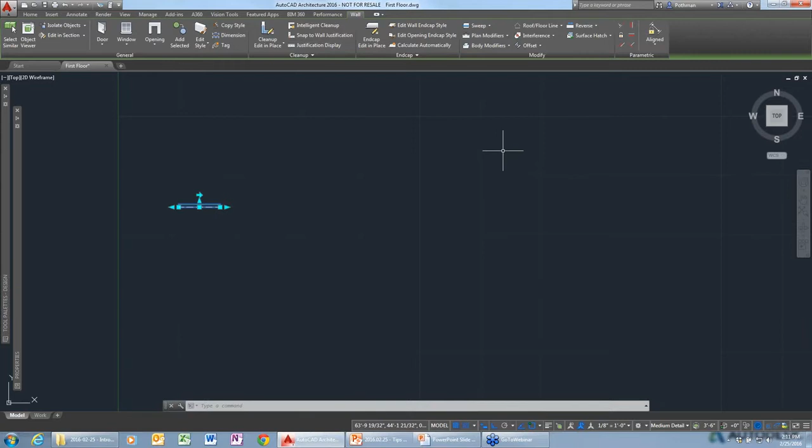We also heavily use the tool palette. On the main design tab, you'll have the various types of objects, but it's just going to start the command. So if I pick on wall, it's just going to start the wall command. We can also break it down into specific types of walls. So if I want to draw a concrete wall, I can select concrete, and I'm drawing a concrete wall instead of just a generic wall. So you have a lot of information readily available here in the tool palette that you can access directly, and you'll see in a little bit how much time you can save by using these objects instead of just lines, arcs, and circles.

AutoCAD Architecture gets into everything from basic construction drawings, drawing walls, doors, windows. It does space planning, so you can create different types of spaces and create reports about the spaces. We have symbology for furniture, plumbing fixtures, all that type of stuff that's built in.

You can do solids using something more user-friendly than a solid, called massing elements, which are much more memory efficient than a traditional AutoCAD solid, and at least as flexible, if not more flexible, than an AutoCAD solid. So we have all of that type of information.

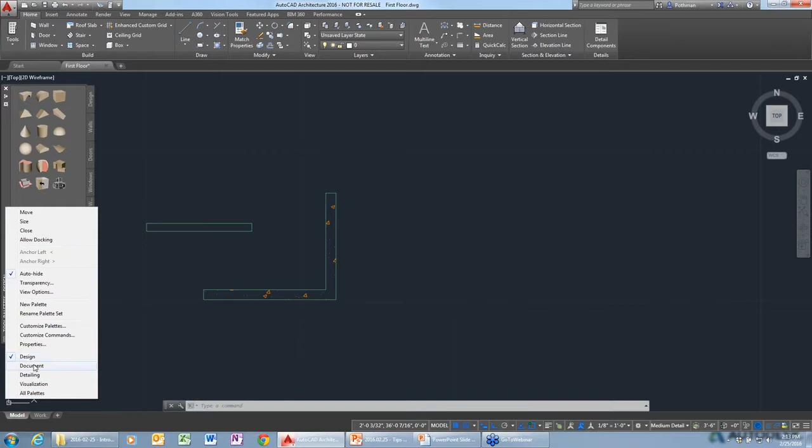If you right-click on the tool palette, you'll see that we can switch between the design palettes, which I have open right now, to the documentation palette, where we can get into information like the various types of annotation, different types of callouts and tags and schedules that are defined within the software. Also some display themes, so it can create spaces based on fire rating and things like that, create a thematic map of the spaces.

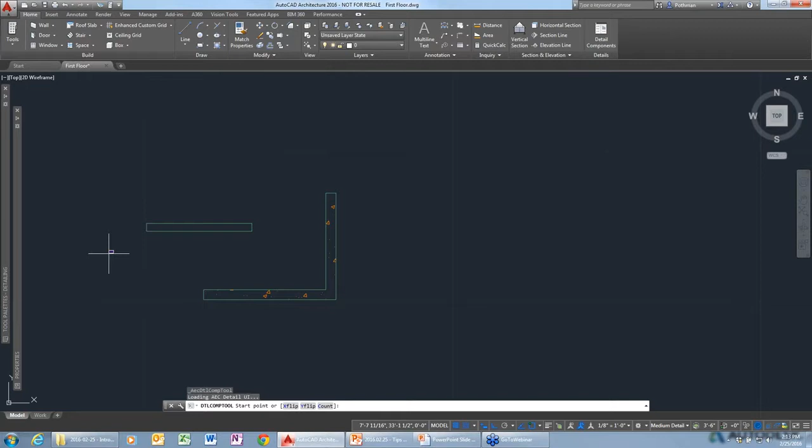We also have the detailing panel, where we can get into basic detail components. You could break this down into getting directly into masonry components or various components to draw your construction details, and it'll go ahead and place the information here. So I can just place a bunch of CMUs real quick.

So that's the tool palettes, and I'm going to go back to the design palette for a moment. Some of the other things you're going to use quite a bit here - I'm not going to get into a lot of detail, but we have the Style Manager, which will allow me to manage the various types of styles that I have in my drawing.

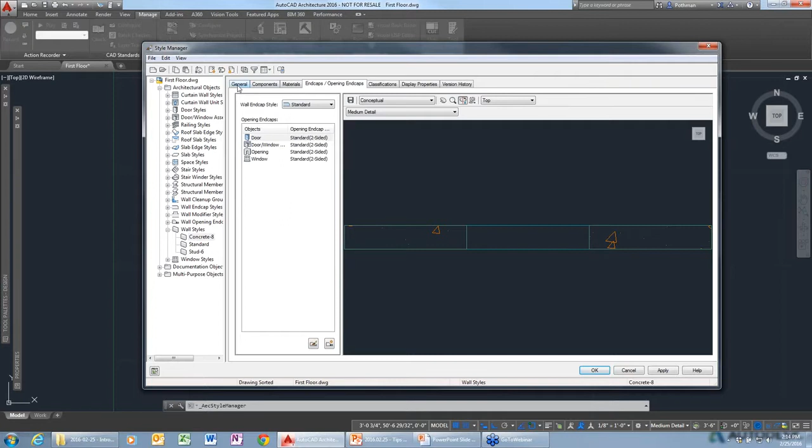So if I look at a concrete wall, I can actually see the components the wall's made up of, material that's assigned to it, assign end cap or cleanup information on how the wall is going to react to doors and windows. Same thing if I look at doors or anything.

This is going to show anything that's in my current drawing file, and you can open up a style drawing just using the open command and drag and drop something in here. But we also have something introduced recently in the last release or so, called the Styles Browser.

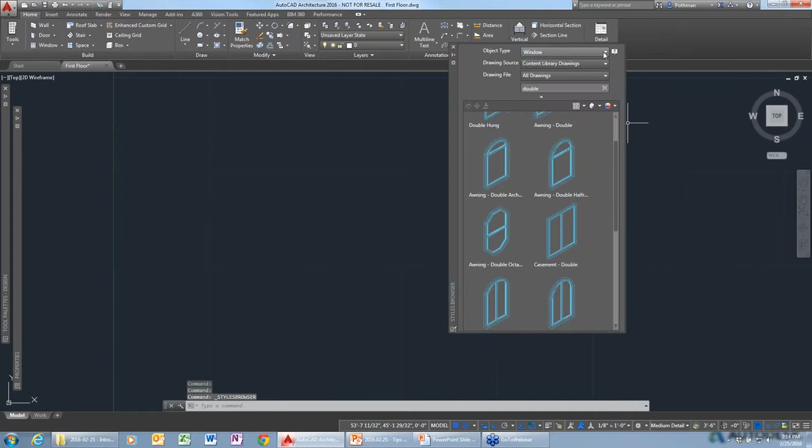This tool will allow me to search through whichever drawings I have as far as content. So right now I'm looking at all my content drawings, and then I can say I want a CMU wall, and it'll show me all the walls that are defined as a CMU wall.

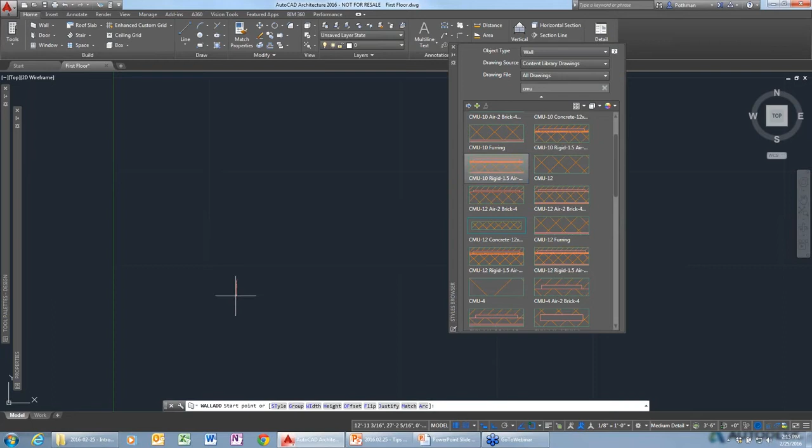So these walls can be quite complex, right? They don't have to just be a simple wall. If I want to, I can double click on this wall to draw one of these walls, and just turning the corner here, you'll see...

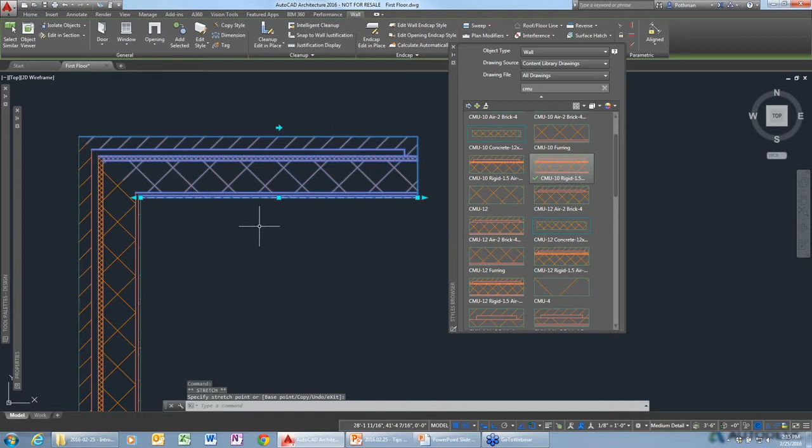First of all, I'm not drawing a line and offsetting it and setting it to a specific layer on a different color and adding hatching. This is actually just a single object that I can stretch or change however I want, and it automatically cleans up with its neighboring objects. So I have this wall cleaning up with this one, and we're getting nice crisp cleanups here.

But we can even do things like assigning a return on my brick, so the brick is actually stopping and coming back and meeting up with the insulation or the CMU on the other component. So you can draw things here in AutoCAD Architecture very simply.

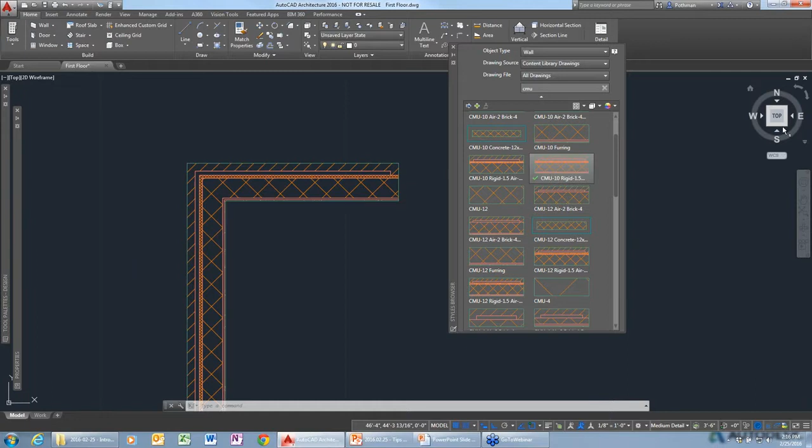And if we were to just flip to a 3D view and I look at this in realistic mode - right? This is kind of a boring side, that's my CMU side here. But if I flip to the other side of the wall, you'll see that here's my brick. So materials are being mapped to these things as well, and you'll see how that works as we move through.

And then if I wanted this wall to be on one of my tool palettes and it's not there already, you can just drag and drop the object to the tool palette, and it'll add a link to that style as well.

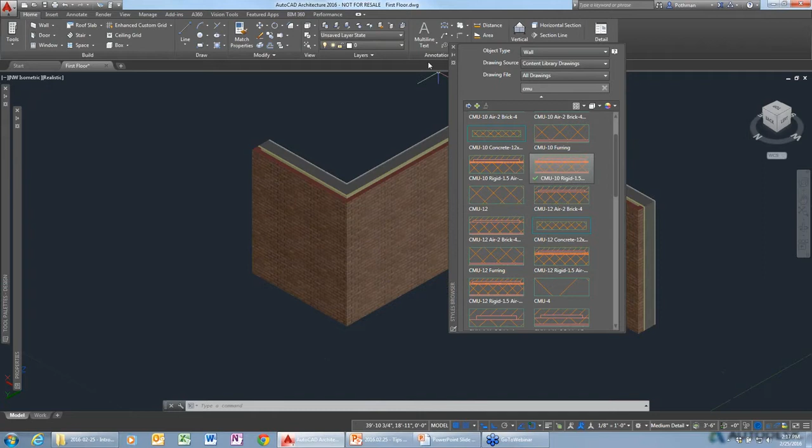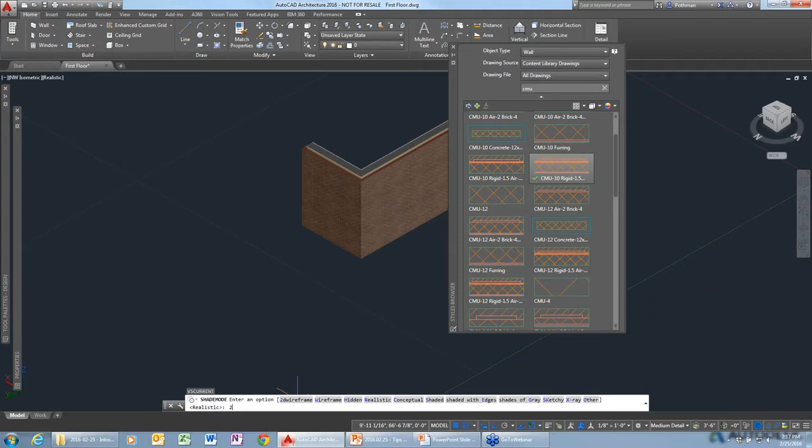So the Styles Browser is a great way of searching through things, and you'll see that within the Styles Browser... I'm just going to change back to the 2D wireframe. And it looks like my cursor is not behaving. There we go.

So we can also search for other types of objects. Come on. And it looks like I might have locked up AutoCAD Architecture, so bear with me for just a moment. I'm sure that it's the GoToWebinar that's causing the problem, not AutoCAD Architecture.

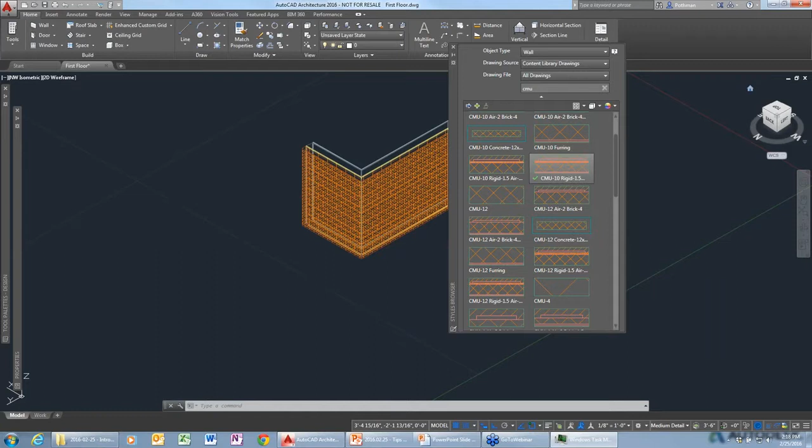All right, so I'm just going to restart AutoCAD real quick.

I'm sure nobody on the webinar has ever had an experience where the software has crashed or locked up on them, so this must be a new experience for you. But let's just wait for this to load back up.

Looks like we're almost there. This just gives me a good opportunity to remind everybody to save often and save early, just like voting. That's a good point, Dave. All right, so thankfully I didn't really lose anything because I was just working with a dummy file anyway.

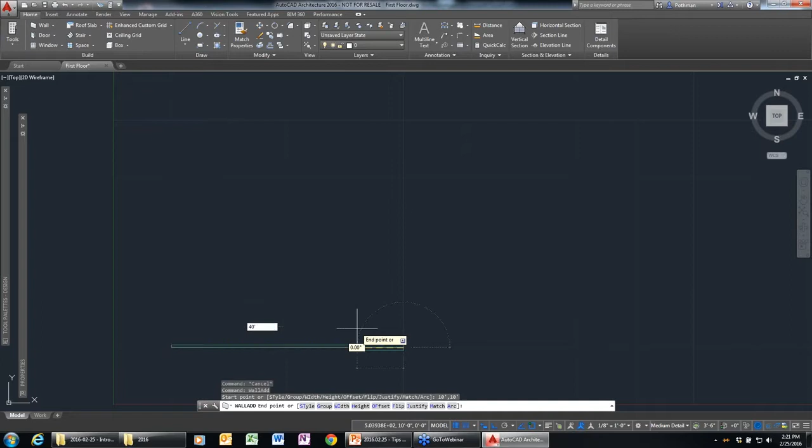So I draw a wall. I can give it a start point, 10 feet, 10 feet, just so that I'm somewhere here. And I'm going to say that I want to draw a 40-foot building by 30 feet. Then I want to go back in this direction and just make a rectangular building. So what I'm going to do is use the ortho close option and just pick the direction, and it'll figure out how far the wall has to go to meet the other corner of the building. So we have a really simple, in this case, generic wall.

And like I said, you can draw very complex walls. It doesn't have to be just something like this. It can be something... actually, let me do this.

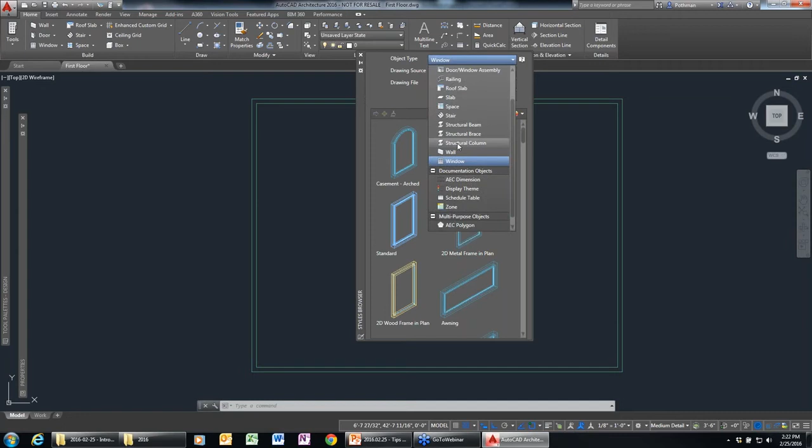I'm going to go back into my styles browser, and you're opened up on the side, and I'm going to go back to my walls, and let's search for siding. So I've got a 5.5-inch wall. Since I'm in New Hampshire, we need thicker walls than you might have down in Florida or something.

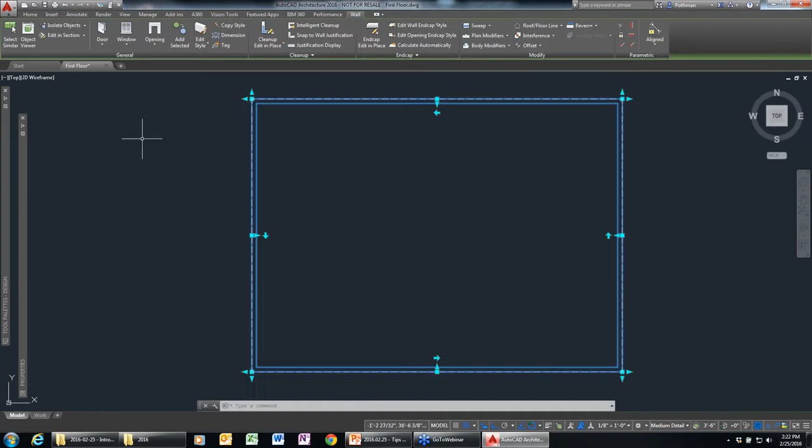I'm just going to select that, and I'm not going to draw that wall. I'm just going to go ahead and close this. I'll select the walls here, go to my property palette, and select my wall with siding. And I probably put that in the wrong direction if I'm unlucky, which I believe I am here.

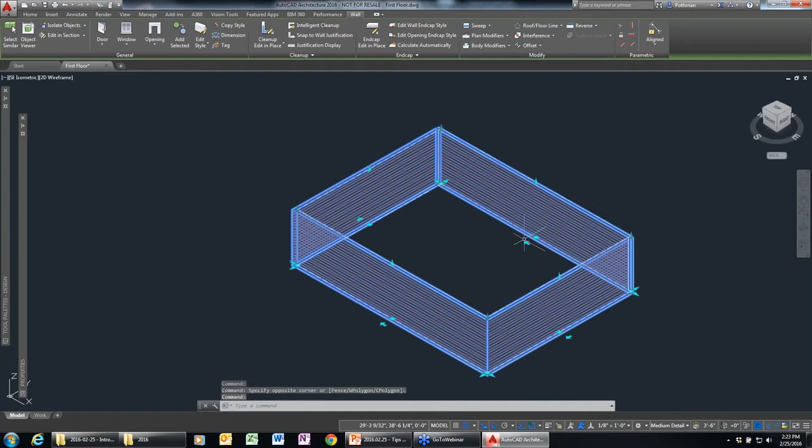So let's see, I can flip the walls around so that the siding is on the outside of the wall instead of on the inside, just using my grip. And if I look at this in realistic mode, now I've got siding on the side of my wall, not just a generic wall.

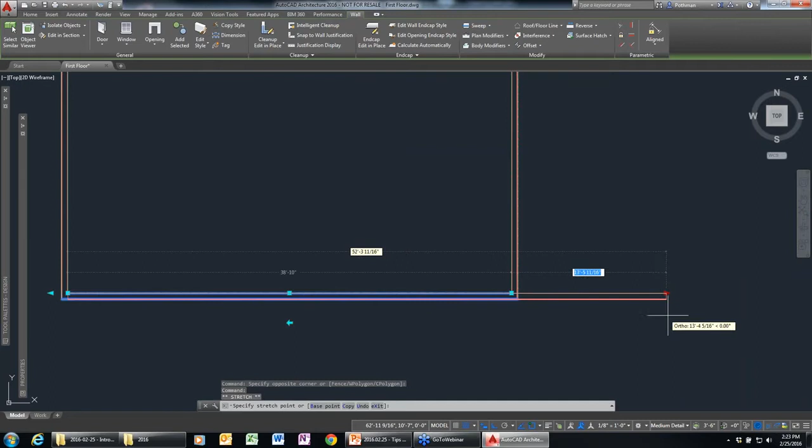These grips available within the software are very powerful. If I select a wall, you'll see there are grips to extend it, so I can just extend it. There's a grip to move the end of the wall, or things like flip, which will flip the wall from inside to outside. These grips are there to help you in your day-to-day drafting.

I want to place a door in the wall, so I'll select it from the ribbon here. Right now I'm set to just a standard door, so I can place this. When I go to place a door, you can select the size just by picking the drop down, and enter whatever size you want. Then there's a nice option here, let me stretch this out so you can see it.

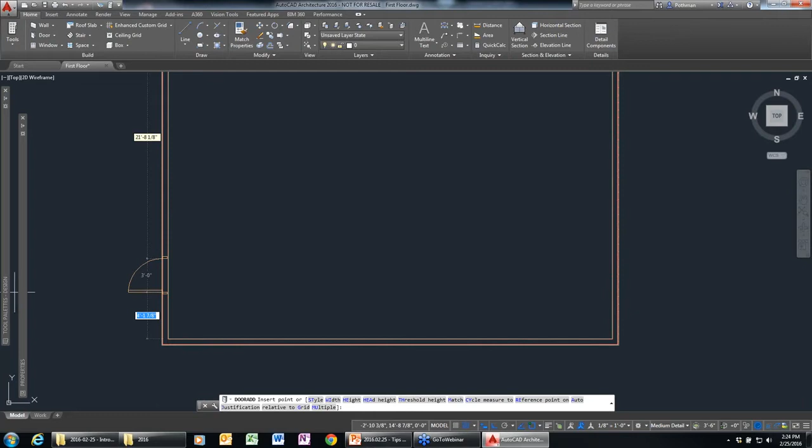There's an option that says position along the wall, and I can have it unconstrained, where I just pick the door and it follows wherever I put it. Or you can tell it to place it with a bit more intelligence, offset, in this case 6 inches from a corner, or centered on the wall. As I move my cursor, it's putting it either 6 inches from the corner, with temporary dimensions showing what's happening, or in the center of the wall, or 6 inches from the other side.

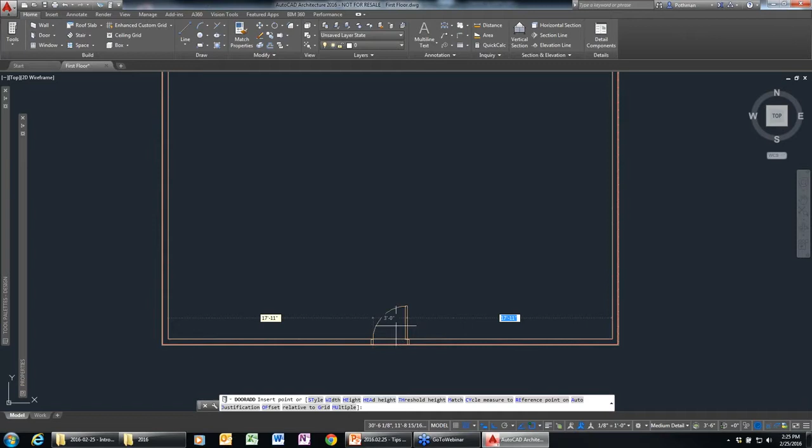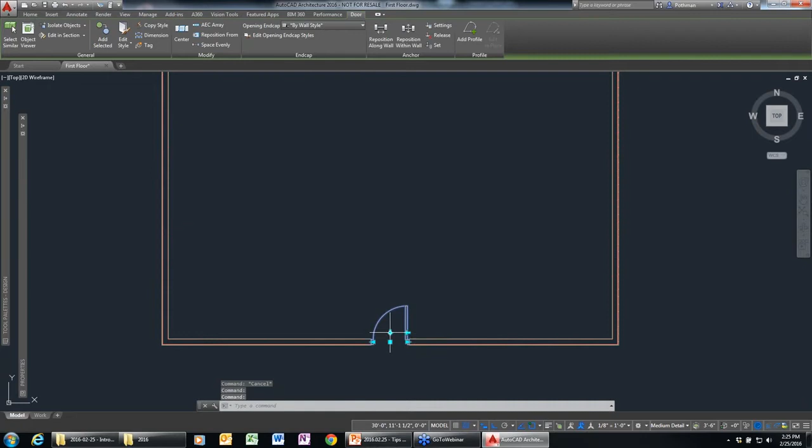So I want this to be in the middle, swinging in to the left. I just move my cursor so you see the swing where you want and place it. Very easily I was able to place that. And if you make a mistake, you don't have to erase it, you can just use the flip options to position the door how you want it. So I did want it the way I had it there.

Very simple, right? I'll go ahead and place some windows. Let's see, what am I set to? I'm set to just a standard window. I'm going to say I want this to be a double hung window, 3 foot by 5 foot, whatever size you want. Right now I'm placing this based on the head height of the window, and telling it I want that to be at 6 foot 8 inches.

So I select the wall. Again, I have this set to be offset or center, but this time set to 3 feet away from the corner or centered, so that's what I want. I'll move my cursor and you see it jumping from position to position, so I'll go 3 feet from the corner, 3 feet from the door, 3 feet from this door, and 3 feet from the other corner. Really quickly I could place those windows spaced evenly along my building.

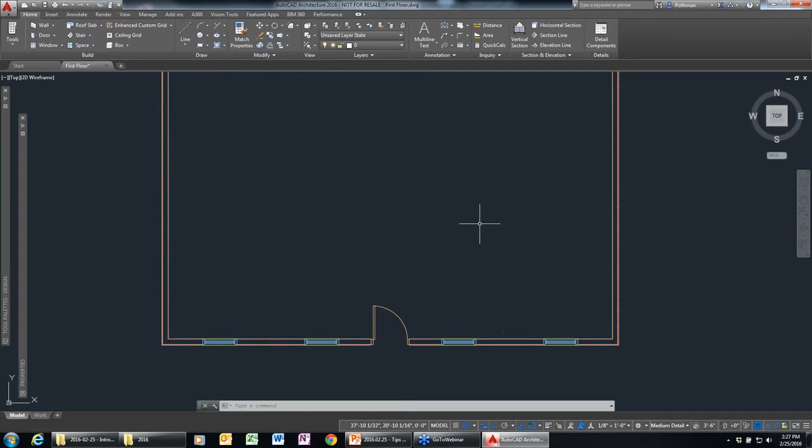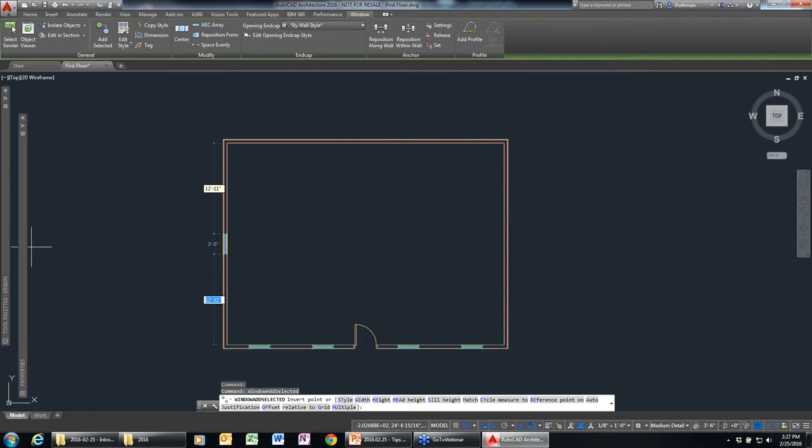Again, don't judge my design because I'm not an architect, but it's that easy to place. And if I just want to place another one of the same type, a great tool we have is this Add Selected feature, which starts you by placing the same object type. So maybe I have a kitchen back here and I want that same double hung window, but in this case I only want it to be maybe 3 feet high because it's going above the counter, and I just want to place it there.

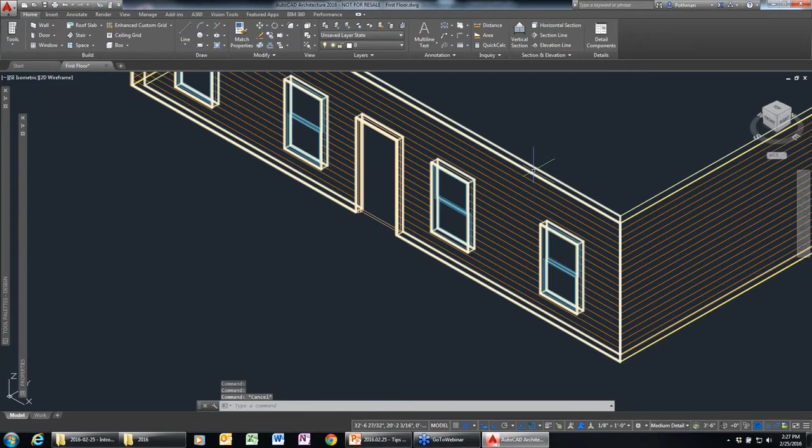Let me flip to a viewpoint here, you'll see now I've got my double hung windows, which are probably flipped around backwards, should be the top panel on the outside, but swapping something like that is just hitting the flip grip and you can fix the panels there. But then I have my 3 foot window, which has the same head height, but it's only 3 feet high instead of 5 feet high.

So very quickly I'm starting to lay out a very simple design, and certainly AutoCAD Architecture does a lot more than residential design.

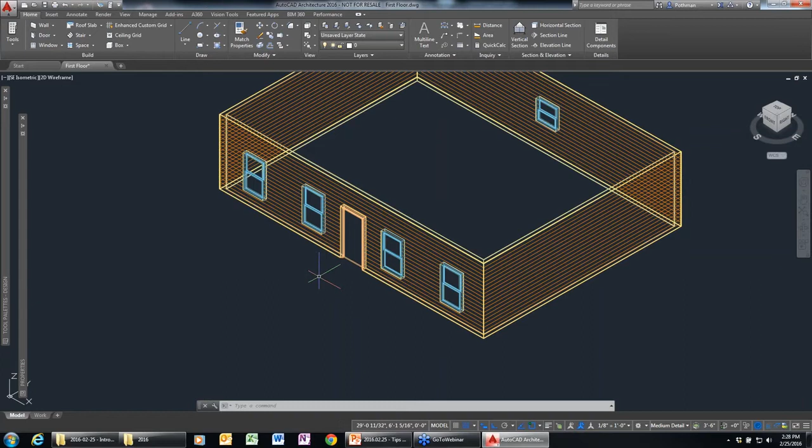It can be used to create the Freedom Tower in Manhattan just as easily as it can be used to create a nice small log home or something. But I want to show you a little bit more about how you can edit some of this information.

First of all, that's a pretty boring door right now, right? It's just a solid panel door, and that's the front of my house. So I might not want that to be just a really simple solid panel door. I can say maybe I want that to be an exterior door with some panels in it, and I can change that, and now I have a nice looking door there. It's not just a solid piece of wood or metal. And if you want something with glass in it or something, you just go to the styles browser and you can find a different style.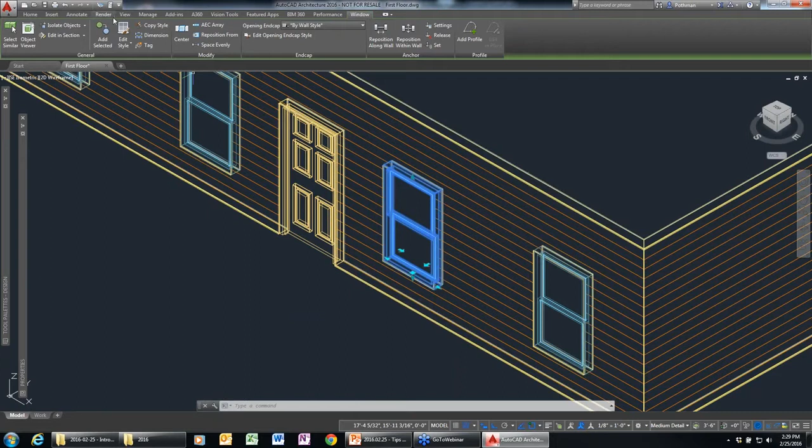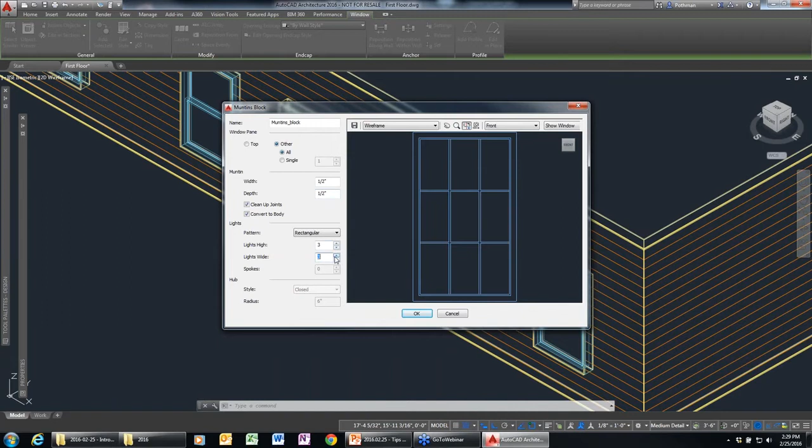For me, I've always liked muntins in my windows. So instead of just a double hung window, I'm going to select one of these windows, go to the Edit Style button up here in the ribbon, and go to the Display Properties, and say I want to add some muntins in here. I want this added to both the top and the bottom, and only a 1/2 inch wide, so that's good. And let's say maybe 3 by 3 - that looks good. When I hit OK, you see that I just added some muntins to the windows here. So you can add in a lot of detail if you want to see that level of detail within the drawing.

I'm going to go back to my plan view, and I'll show you a little bit more about some of the other types of objects.

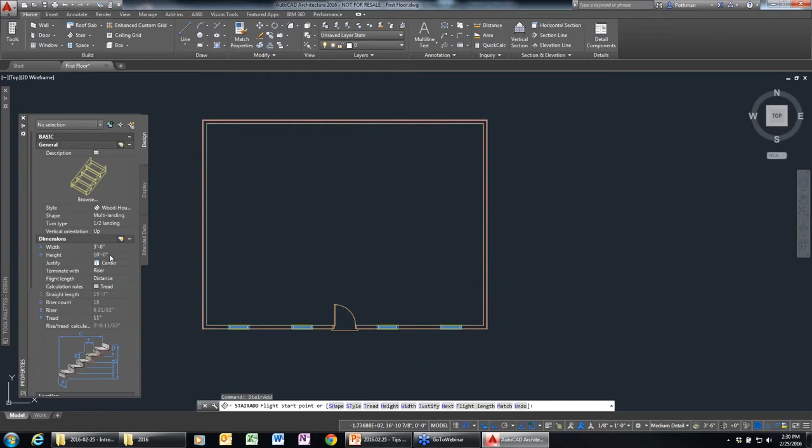Obviously this is right now just a single-story building, but just like the government, I'm going to go ahead and add a stair to nowhere. So I'm just going to put a stair in here, and let's say it's 3'8", that's fine. My floor-to-floor height's 10 feet, which is fine. I'm going to say I just want to start it here, and draw it up that way to my second floor.

Again, imagine how much time it would take you to calculate your riser and tread size, draw the stair in a plan view. You can see that I have a cut plane here which is controlling the display, so the bottom portion of my stair is showing up with the treads and such, and the top is just displaying as a box.

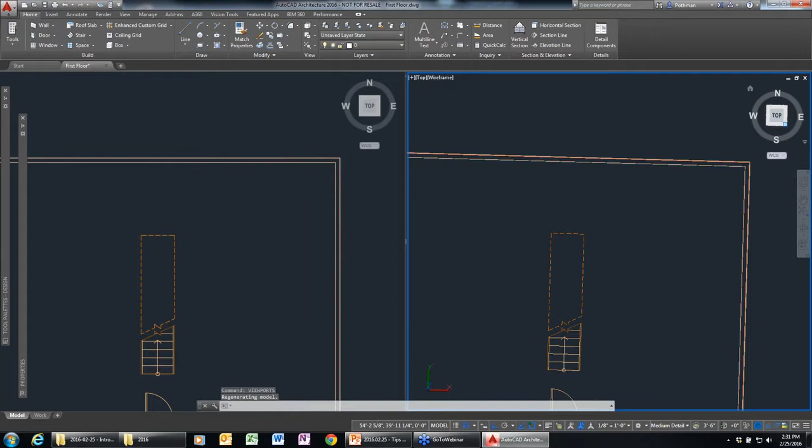And again, if we want to, let me do this. I'm going to go to viewports, and say I want 2 vertical views, and on the right side I'm going to set to a 3D view. So not only did we create the stair for my construction drawing, but I'm also getting a stair in 3D that can be shown in elevations or renderings or whatever you want.

And these stairs can be, if I go back to the content styles browser and I'll look at stairs, you'll see that right out of the box, we have some industrial style stairs, cantilevered stairs, concrete stairs. We've got steel stairs, ramps. So there's a lot of content here that you can choose from right out of the box.

The other thing that we can do is, what good's a stair without a railing? So let's go back over here to railings, and I just want to set this to be just a generic standard railing, and I'll select the side there, and you can see that I just added a railing.

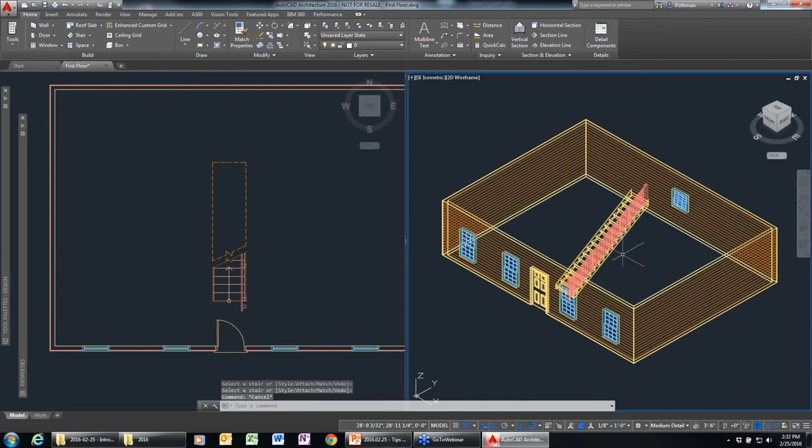In this case, it's an awfully boring railing, but if I went to my style and changed it to be a guardrail with wood balusters, now I've got a nice looking staircase with some nice balusters on the side, and something with a little bit of detail that looks nice. And again, you can see the materials being applied to the objects as we go through. So that was a pretty simple stair.

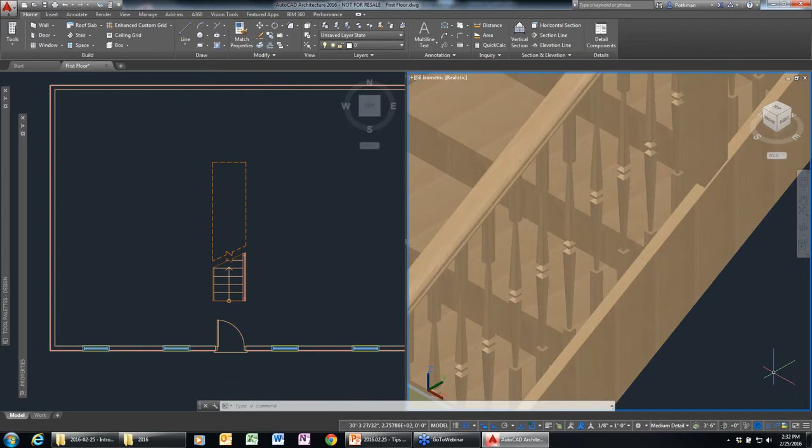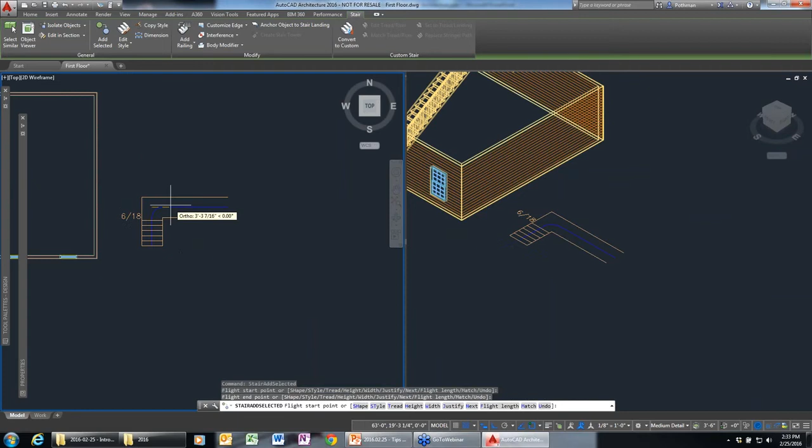What happens if you have a stair that's a little more complex? I'm going to do add selected to draw a stair. Let me pan out so you can see what I'm doing. I'll draw it on the side, go up a few treads, add a landing, and continue off in that direction. And we just drew a nice L-shaped stair with an extended landing.

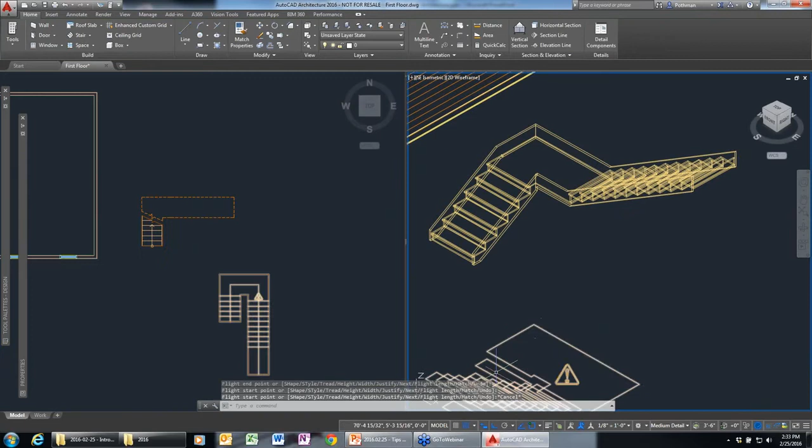If I select this and do add selected again, you can see this is all the same command. I want to come up and make it go further, making a U-shaped stair. Let me swap between various options - actually, that one didn't draw right, let me draw that again. Add selected. There we go, now we have a U-shaped stair.

So you can add, with a single command, something very simple or something very complex. And adding a railing is just a matter of picking the edge of the stair and telling it to add a railing. So it's very simple to add even a high level of detail.

Right now, with this house and my stair to nowhere, I'd probably be getting a little wet if it started raining - it's been raining here quite a bit the last day or so. So let's put a roof on this. To add a roof, I'm just going to pick on the corners of my building, and you can see how it's adding in my roof just by picking the corners.

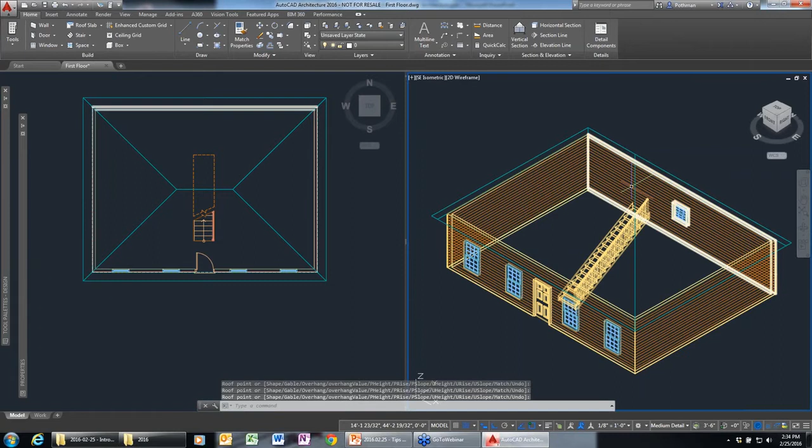So I've got a nice roof being placed, and I don't really like the hips - I'd prefer a gable over here. I'm just going to use my grip on the corner and stretch it out. Let me do it this way instead - I'm just going to stretch this, and now I have a hip or a gable on both sides.

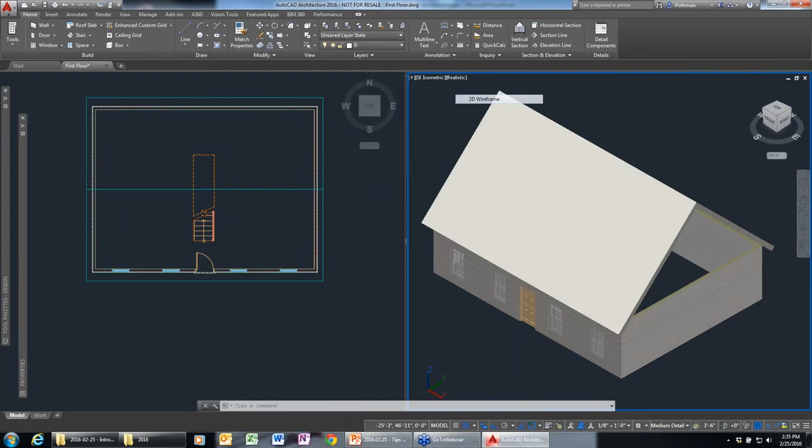Of course, I'm still going to get wet if it rains because I have this big hole here between the roof and my wall. So I'm going to go back into my wireframe and pick on the wall - remember the contextual tabs and such?

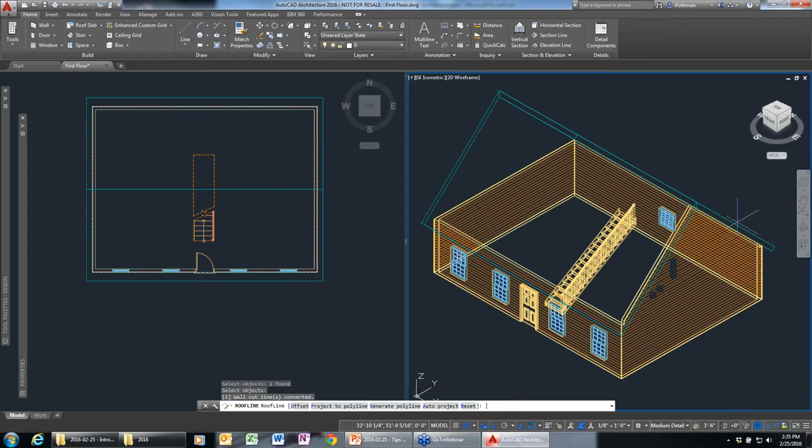There's also the same kind of commands in the right-click menu. I'm going to go to this roof floor line pull-down, and I'm going to say I want to modify the roof line, and auto project it to my roof - you can see what happened here. I do the same thing on this side: roof floor line, modify roof line, auto project, pick on the roof. And now I have that whole side of the building filled in.

Let's add another door, why not? We'll do add selected and put a door in over in that direction. And maybe add another window over here, so add a window there and there. You can see you can work in plan view just as easily as you can in a 3D view.

Just keeping an eye on the clock here. So we're able to create something pretty quickly, right? So that's some of the modeling things.

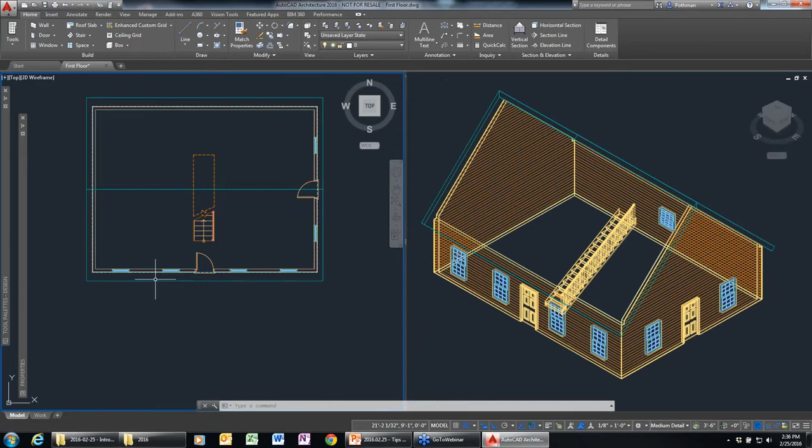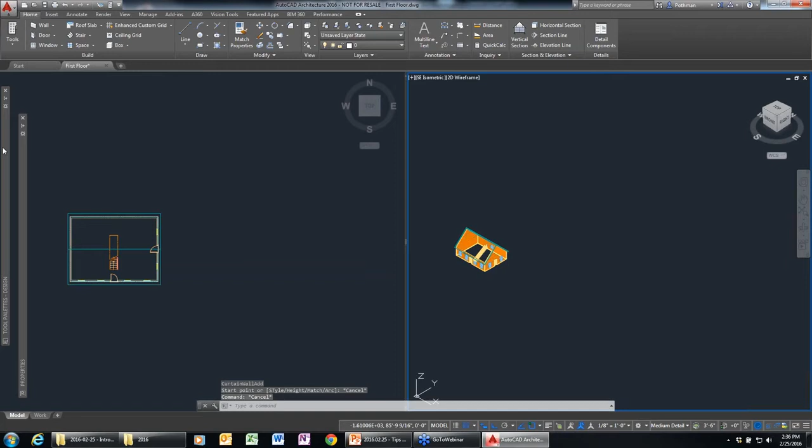I want to show at least one example of a more complex object here, even beyond stairs and roofs. If I go to curtain wall - I don't know if I already created or added one in here. Oh, I did, all right, so I've got a standard one right now. Let me add something - actually I'll start with that one. Curtain wall, and I want this to be 39 feet high, that's whatever, right? I'm just going to pick a couple of points, and you can see I'm actually creating an entire set of panels for a curtain wall.

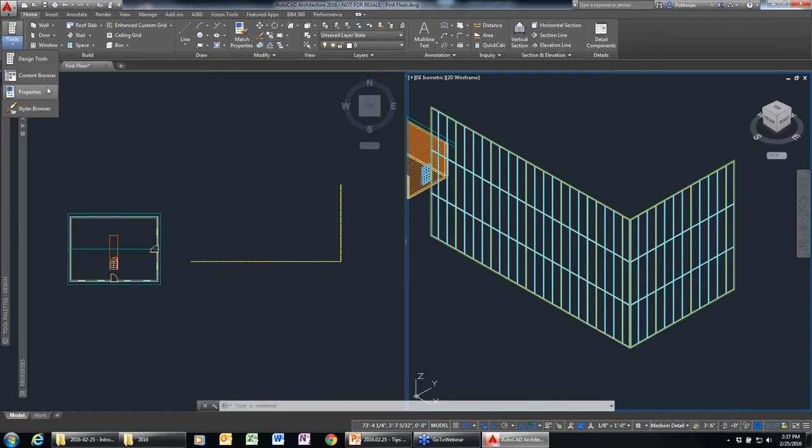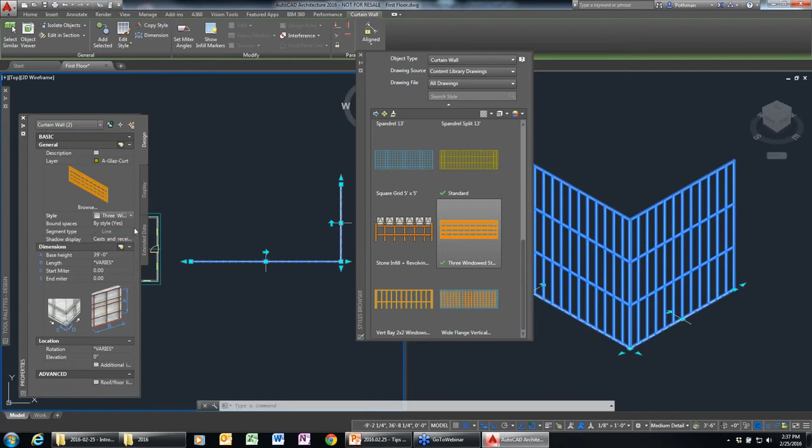But if I go to the Styles browser and look at curtain walls, let's say we do a 3-story building - that's fine. I'm just going to go ahead and select that and change my style. And now I've got a curtain wall with windows and materials and everything else.

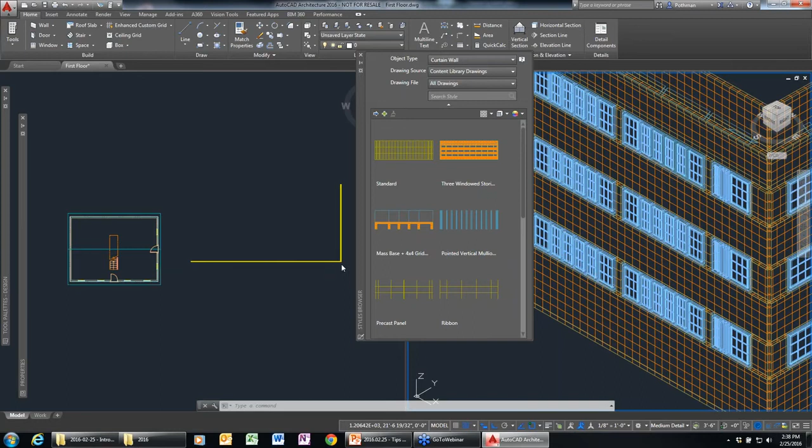I'm not going to explain how to create these styles because that could be a whole webinar by itself. But as an interesting side note, I think all of the styles in here are from my curtain wall library. I actually went through Boston taking pictures of some of the buildings there, and that's what they modeled some of these curtain walls on as samples. So it was an interesting experience where I was able to add information that became content within the software.

So let me go back here - I don't need this other viewport right now, so let me go back to single view.

Let's talk about construction drawings and scheduling. I'll go to the annotate tab because I just want a window tag. I'll select my window and choose a location for it. What happens here is this tag automatically attaches property set information based on what it's pointing to, pulling information out of the object.

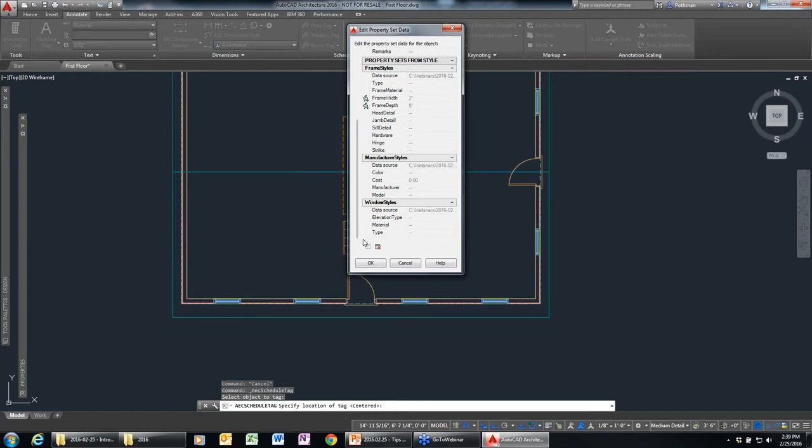You can see things like the style, double hung, the width and height, the head height, and you can enter information about materials and manufacturer. I just place that and it tags the window. I'll use the multiple option because I don't want to tag each individually. I'll hit OK, but looks like I missed at least one window, so I can undo that and place the window tag again.

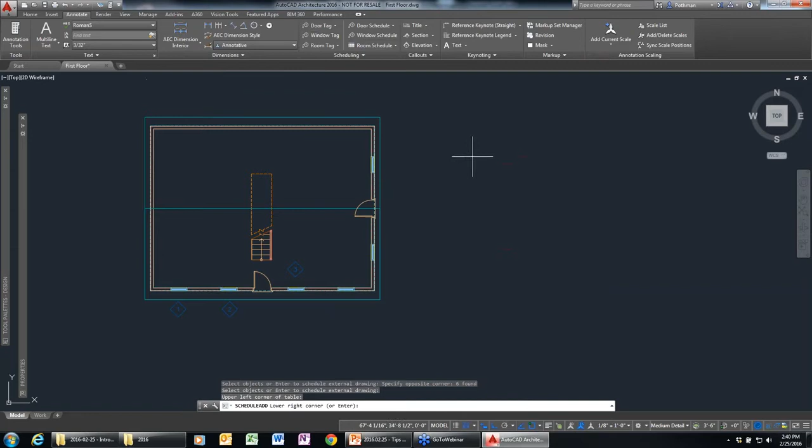So I'm placing some tags, and we can put that information in here, then do a window schedule. I'll select everything and place a window schedule. I didn't get all the tags in, but that's okay—if I want to add more, I just do add selected. You can see the line that shows up, and I can tell it to update the schedule, now I've got all my windows.

I think I forgot one, maybe I erased that one in the back of the building, but I've got all my windows in my window schedule. So it's that easy to place. And in the schedule, instead of manually updating, you can tell it to automatically update. Say automatic update yes. If you're doing a renovation, maybe set it to no, so a change to the building doesn't automatically update it.

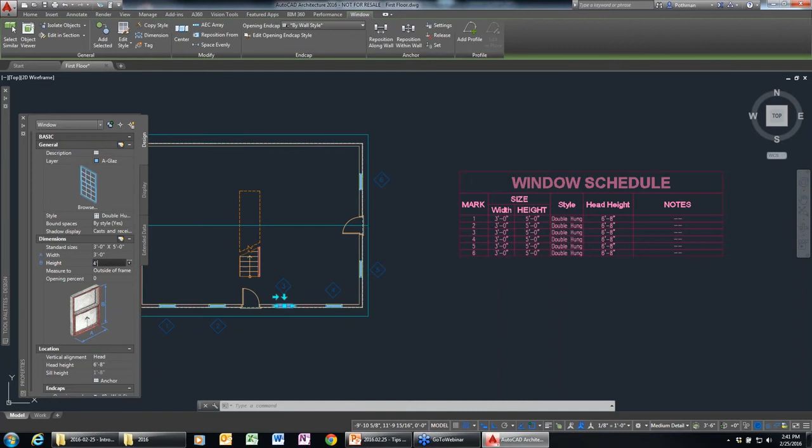And I want to automatically add new objects, yes. So now if I made a change to the schedule or building, say this one's going to be 4 feet high, you can see it automatically changed in my schedule. So it's really simple to add annotation and schedules, and this can be in separate drawings—it doesn't have to be in the current drawing.

I'm also going to do a couple of elevations. Let's say I want an elevation here, looking this direction. If you're using Project Navigator, you could put this in a different drawing and have it linked, but in this case I'm just showing a real quick example, so I'm saying I want it to be here. Oops, gotta read my prompt sometimes. Elevation.

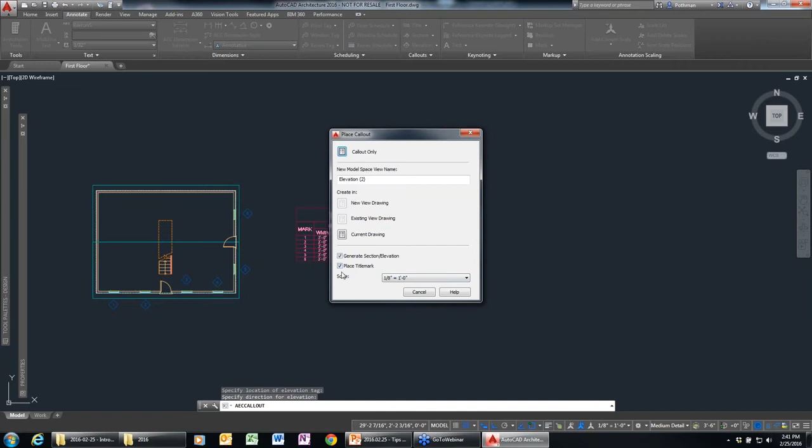My current drawing. Specify the corner, yes, and the result's over there. There we go, so I just created an elevation. You can see I got my double hung windows, my door and door swing, the siding, and that's my roof. Let's go ahead and do another elevation over on this side.

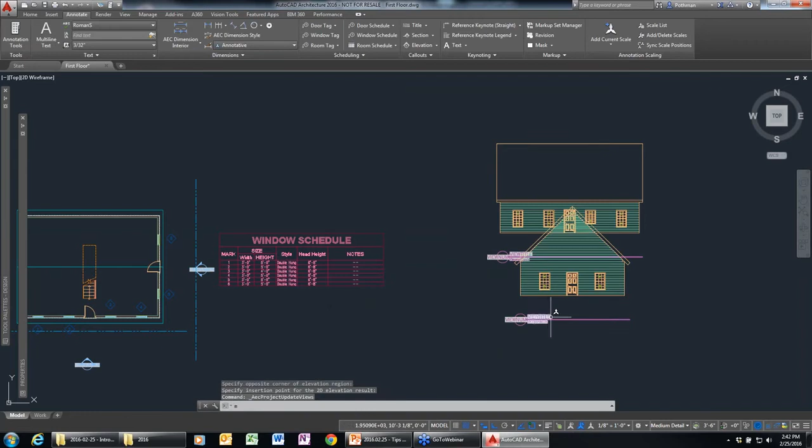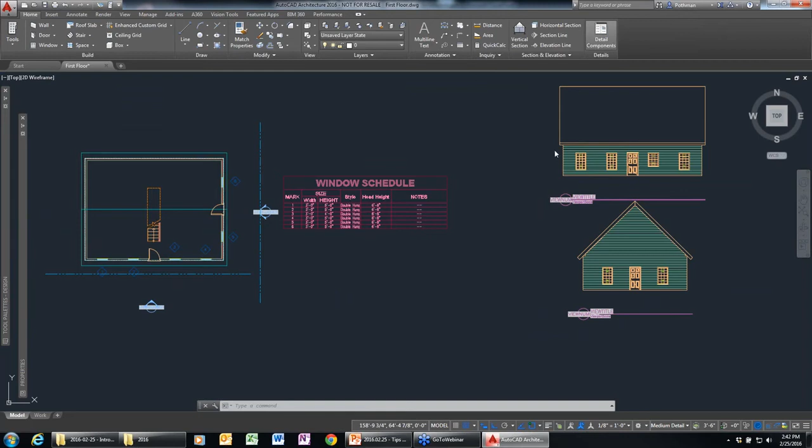By the way, if this was going into a separate drawing file, it would automatically update the tag with its sheet and view number and such, so we're able to place that kind of information on the model real quick. The other piece I want to show, just a quick example since we don't have a lot of time, is the Detail Component Manager. I think the software is worth using even just for this—it's a really powerful piece of the software.

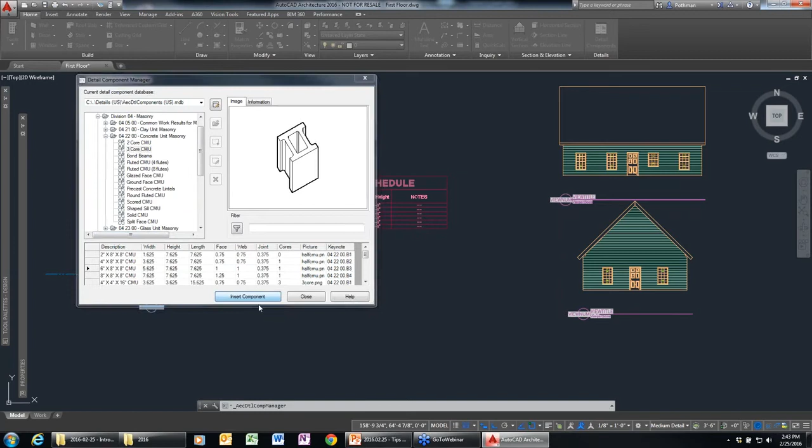We have a huge library of detail components. If I go into masonry and want a concrete CMU, say a 3-core CMU, you can see different things here and different sizes. I want a 6 by 8 by 8. I'll say I want to insert this in my model, and I can tell how I want it placed—in elevation, section, or plan. In this case I want an elevation, and I want to go from here.

Actually, no, I think I want section.

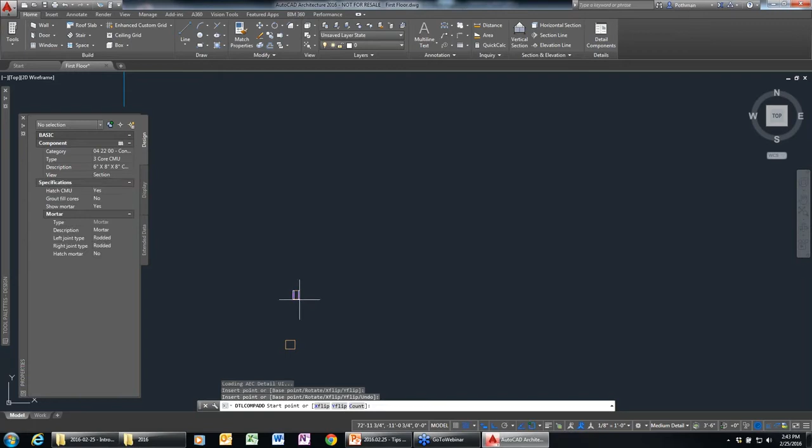There you go. And I want to draw it up 10 feet. So I just drew all the CMUs for a 10-foot wall. You can see hatching and everything that goes along with it.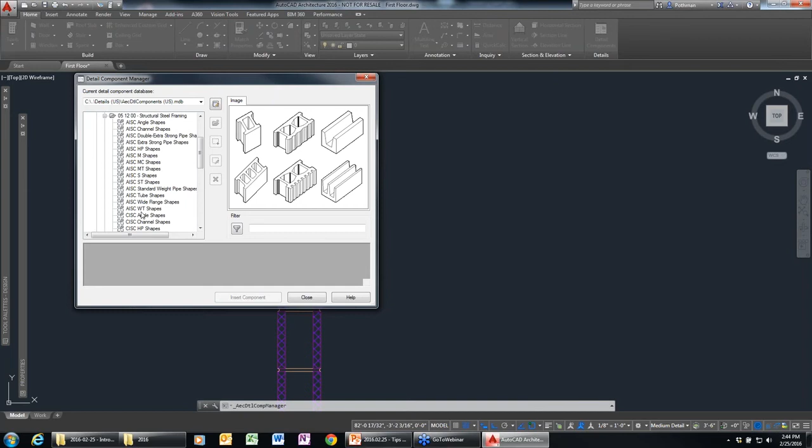I'm just going to go back into my Detail Component Manager. And there's brick, there's metals, all of your steel framing, right? Your various shapes and everything that you would need, all your standard sizes.

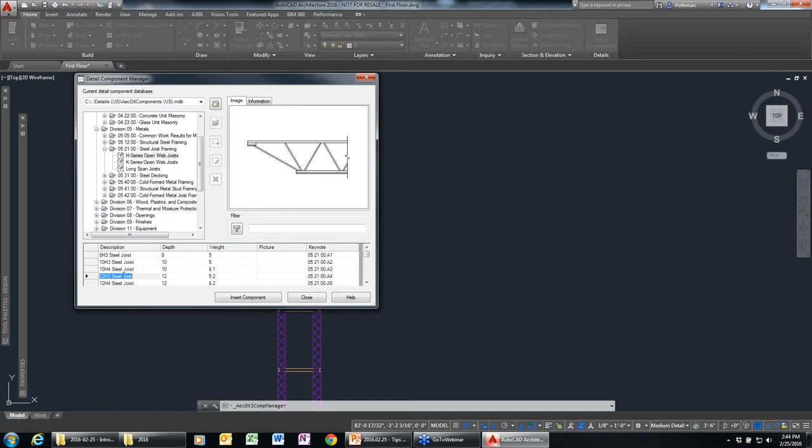One of the ones that I like to draw here is steel joist. I'm going to go steel joist, and I want an H-series steel joist, and I'm going to say insert this. Again, we can come over and say, in this case, I want this to be an elevation view. I'm just going to pick the corner of this, and draw it out of the ways, and then I can add in my end piece here.

You can start building up your detail with all of the various components. You can do keynoting of the details, and have a nice set of tools to build this. I'm not changing layers or inserting blocks. It's doing all this work for me automatically.

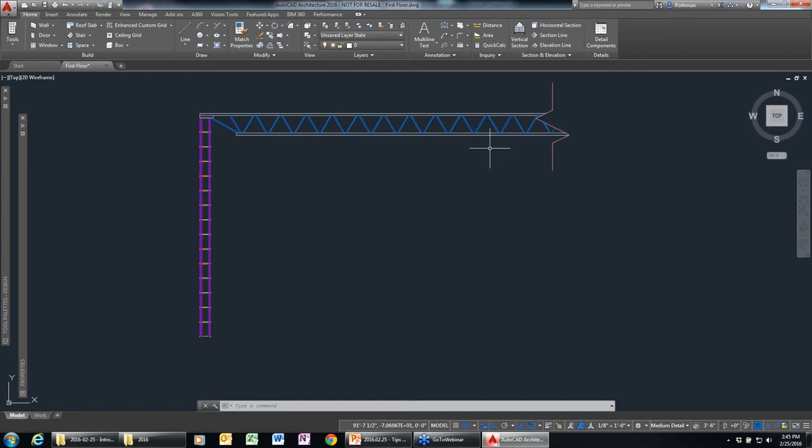So what do you think, Ashley? Do you like my design, or should I make any changes to this? Yeah, Dave, I personally really like the look of brick.

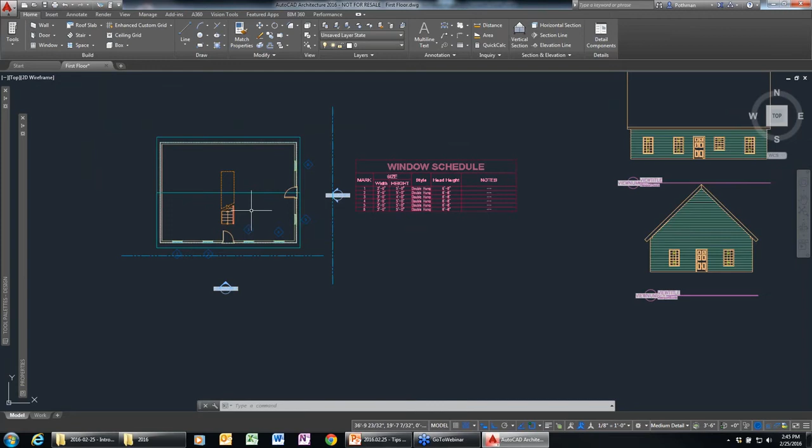Can you change the exterior walls to brick? Let me see. That's probably going to take a little while because I have to draw some new hatching and everything. But let me take a look here. First of all, do I have a brick style? I don't even know if I have a brick style in my drawing. So let me just check. No, so I don't have a brick in my drawing currently.

So let me go to the Styles browser and let's go find a brick wall style. I probably want to search on brick, I would think. And let's just do a standard—no, I don't want a 4-inch brick. Let's do a double brick wall. So I'll select the double wall there to bring it into my drawing.

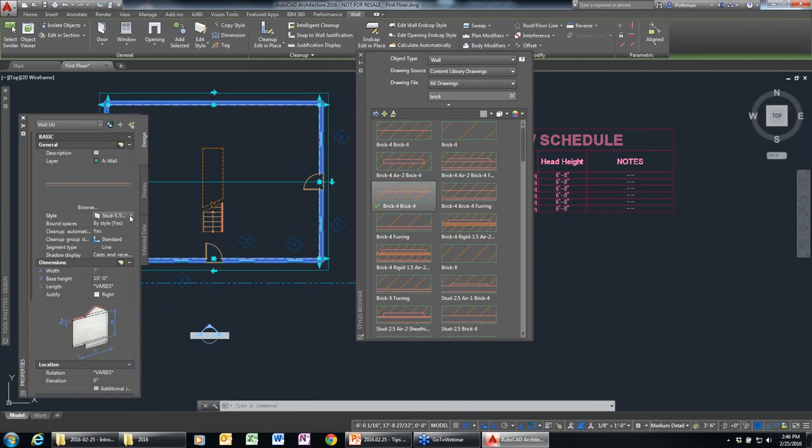And I'm going to select on the exterior walls and go to my Styles browser and select a brick. If we were to look at this now, we've got brick walls instead, right? So what do you think? You like that? I like the brick, but I have a couple of other changes for you as well.

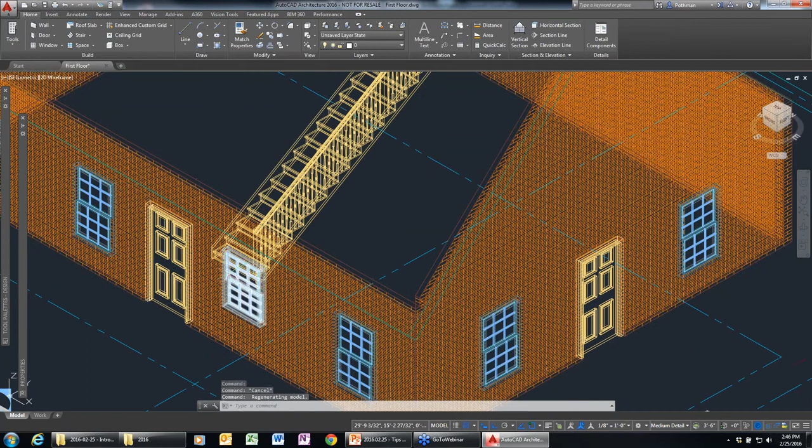I like to have a lot of light in the house, and I'd really like to see if you can change the windows in the front of the house to double casement windows.

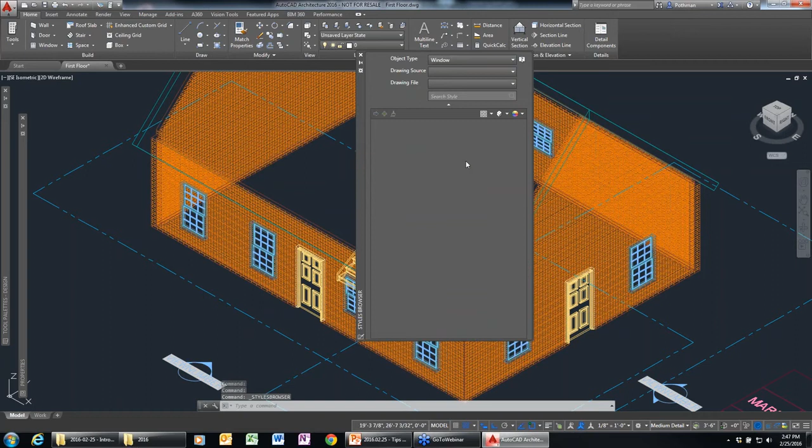Okay, let's see. So again, let's start off by going to my Styles browser because AutoCAD Architecture does have a lot of different styles in here. And let's say double or casement. So I got a double casement window style. Let's try that one. And let's pick on these 4 windows, goes in the front of the house.

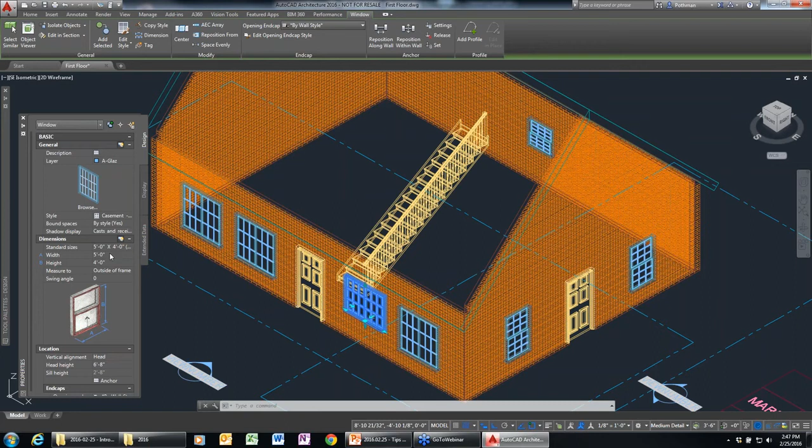Go to my properties. And let's see, I want this to be a casement double, and we don't want it to be 3 feet. Let's say I wanted to make it 5 feet wide. Okay, so does that look better? Much better, much better. Yeah, I'll make this one back to 4 feet tall too, just so it kind of looks goofy the other way.

Okay. And the other change, I'd like to have more usable room on the second floor. I was thinking if you could change the roof to a 5-pitch roof, I think that would work better. Okay, actually, right now I think I have a 12-pitch, which is kind of crazy. But let's change this to a 5/12 roof.

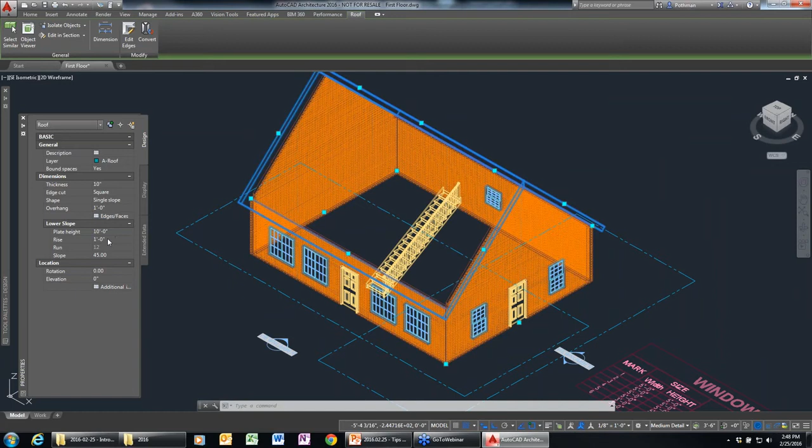And then I'm just going to go back to my walls, to roof floor line, modify the roof line. We'll do an auto project to fix my wall. Let's do the same thing over here.

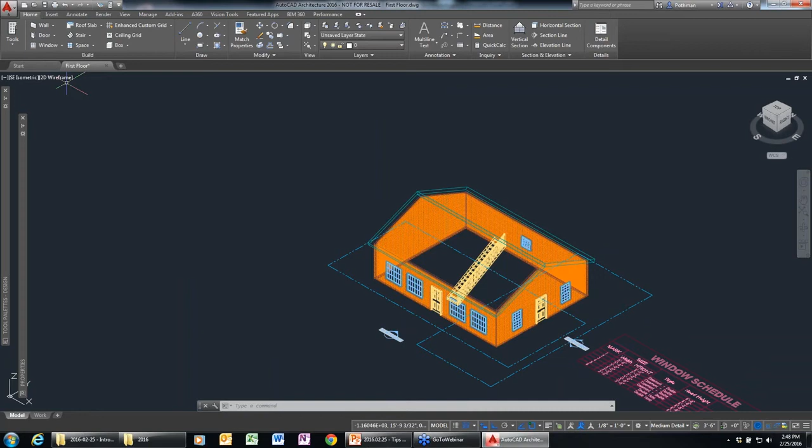Auto project. So what do you think about that? Much better, perfect. So let me just show you what it looks like here with the realistic style.

Right, so you can see them. You can actually see right through my windows, by the way, and see the stair that's in there. Stair to nowhere.

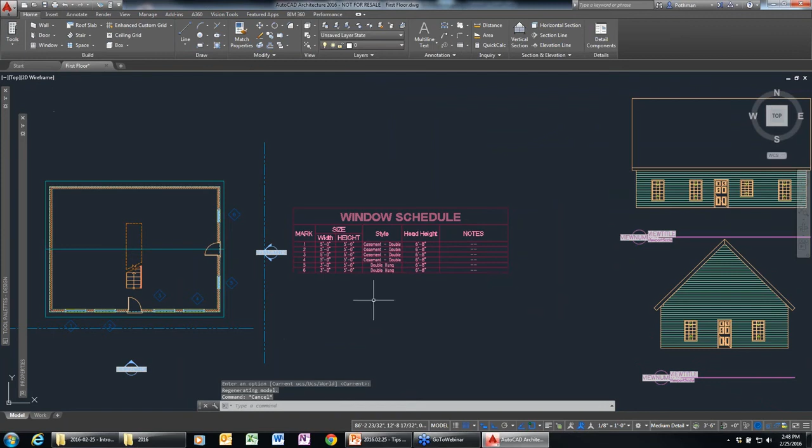And then what I'm going to do, I probably need to update my construction drawings as well, which happen to be in the same drawing here. So you can see that my schedule is automatically updated. I now have my casement double showing up, and then my elevations are wrong. So I'm just going to tell it to refresh both of these, and there's my updated elevations.

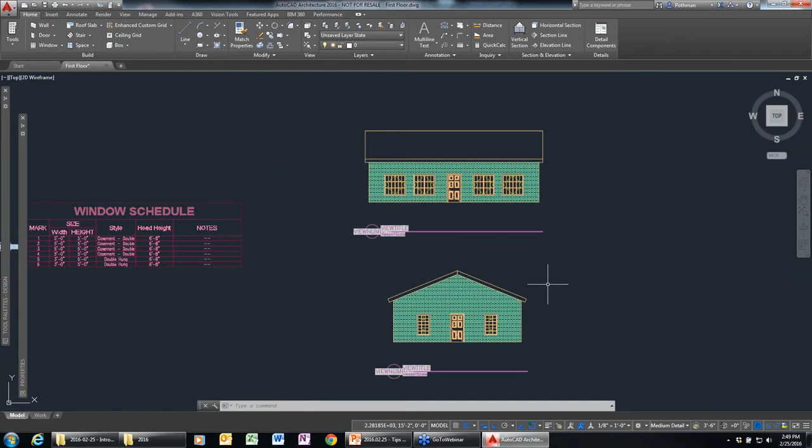So I hope that in this very brief presentation I was able to show how AutoCAD Architecture is the right tool for doing building design within AutoCAD. It's very easy to use, with a lot of automation happening in here, automatic sections and elevations, construction details, and everything else. I wish I could spend more time showing it, because it does an awful lot more than what I've shown. But at this point we'll jump back over and go through the last couple of PowerPoint slides, and then we'll see if we have any questions that I can help with.

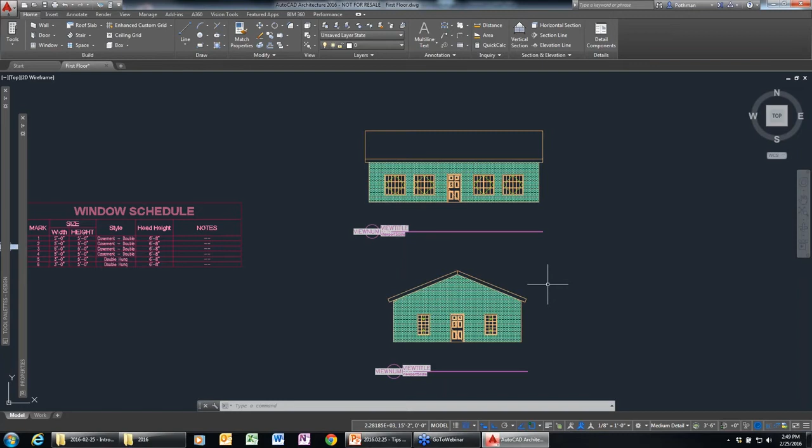So let me get back to where we were. Whoops, too far.